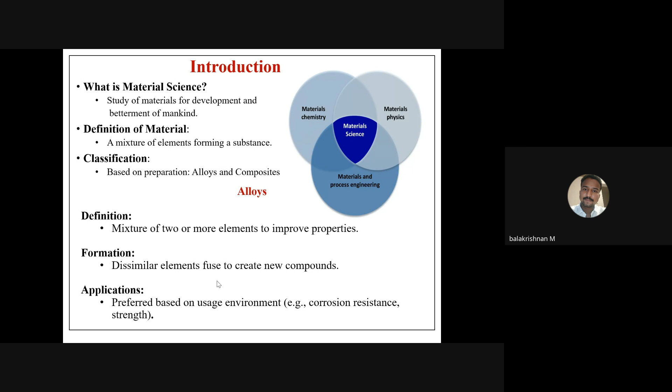When we look into composite material, it is a combination of distinct materials with superior properties. The major composite material structure is improved by matrix and reinforcement. The main advantage is superior physical and chemical property. The composite materials come under the category of polymer matrix composite, ceramic matrix composite, and metal matrix composites.

While considering polymer matrix composite, lots of applications are there. Mostly in the medical field, we are looking at new research materials in polymer composites. But the limitation is it's difficult to achieve continuous phase during the processing. This is very important and difficult while considering the polymer matrix composite.

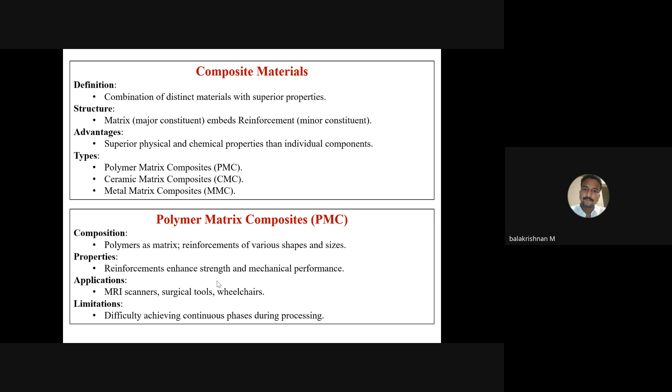Then ceramic matrix composite. The main motive of this kind of composite is to withstand high modulus, low shear strength, and it is very suitable for elevated temperature also. Most ceramic matrix composites are applied in high temperature applications in industries, but the limitation is brittleness due to the increasing toughness. While considering ceramic components, temperature plays a major role.

Metal matrix composite: reinforcement material dispersed in a metallic matrix. So we can consider the metal matrix composite through different preparation methods.

Number one, powder metallurgy: the mixing of metallic powder, blending, compacting and sintering like that. The main disadvantage is the product size is very limited. It is not probably possible for a large size of component.

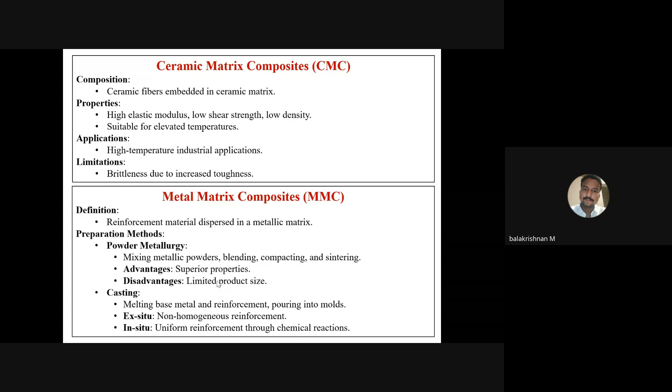Then casting. When we look into casting, it is a very suitable method for large size products. Then in casting, we are considering ex situ casting and in situ casting.

Then we look into metal matrix, aluminum metal matrix composite. It is a classification or subset of metal matrix composite. But due to the application of aluminum, there is a lot of research opportunity in aluminum matrix composite, like economical, lightweight, corrosion resistance, machinability and non-magnetic properties. The most wide applications of aluminum matrix composites are in aerospace, automotive and marine industries.

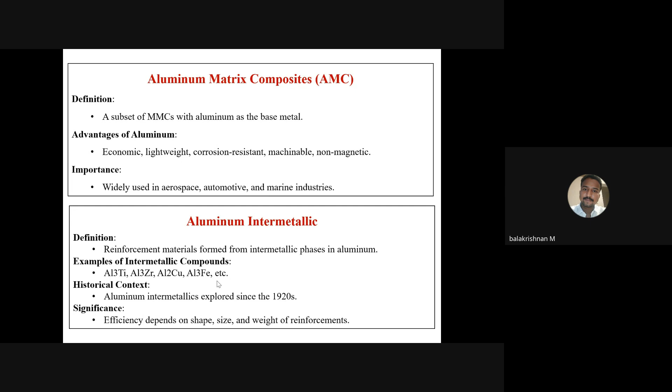Then when we look into the intermetallic composite, the reinforcement materials are formed from the intermetallic phase in the aluminum itself. So we can get excellent bonding in this kind of intermetallic composites. Some examples of intermetallic composites are Al3Ti, Al3Zr, Al2Cu, etc. But it is significantly very efficient, though we have to consider the shape, size and weight of reinforcement.

In this presentation, we are more focusing on secondary processing technique. The processing may be done by two or more processing steps, either single processing or multiple processing, which is carried out on the material immediately after manufacturing or through some other techniques.

The secondary processing refines the property of metal in a vast manner. Some secondary processing techniques, including rolling, extrusion, forging, and equal channel angular pressing, were used to attempt the desirable microstructure changes, because microstructure changes are very important while considering the mechanical property or to enhance the mechanical property of a particular material.

But in case of tensile behavior of intermetallic particles, changes must be needed to improve the tensile behavior. But it is difficult to alter the entire microstructure in the initial stage. The plastic material flow in the above secondary processing techniques is very low when compared to friction stir processing.

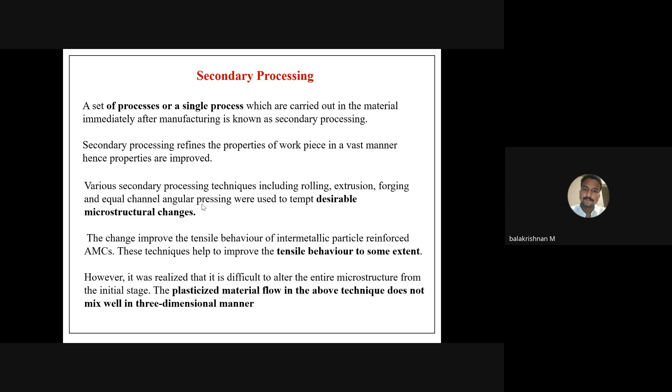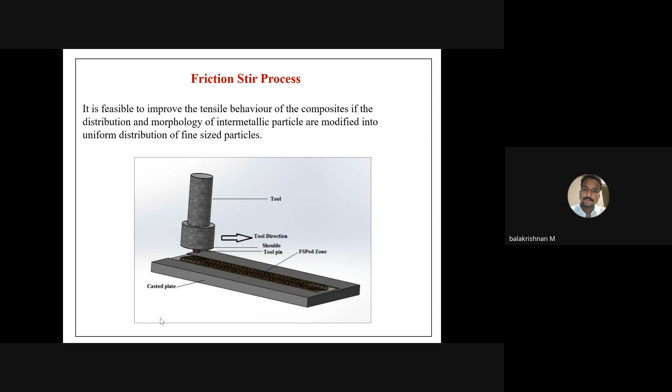In this case we have to consider important parameters like the tool, speed, traverse speed, depth of plunge, dwell time, etc. There is a lot of research opportunity depending on the tool itself. The three major parameters while designing the tool are shoulder diameter, tool pin profile, and material of the tool. Then we must consider what kind of matrix we are going to process. These are the major considerations while selecting this process.

Compared to other techniques like rolling, forging, equal channel angular press, extrusion, FSP has the following advantages. First, it is a solid state process. Then the process parameters and tool design improve the results.

The length of the tool pin can be modified according to the required depth of the stir zone. The FSP component does not undergo any changes—there is no change of shape and size of the metal after FSP.

Poisonous gases, noise, and radiation can all be avoided with this process. The loss of alloying element is limited. It's an important consideration—some losses occur in other processes, but we can limit losses with this process.

It is easy to automate the entire process, and there is no need for a specialized machine—a vertical milling machine is more than sufficient for some kinds of materials, but it's not suitable for heavy materials like bronze. So for magnesium, aluminum, or steel, we can use this approach.

The tool is non-consumable, but even so, it will wear out as the process is repeated. We can still improve the structure of the material with fine grain and a defect-free process zone.

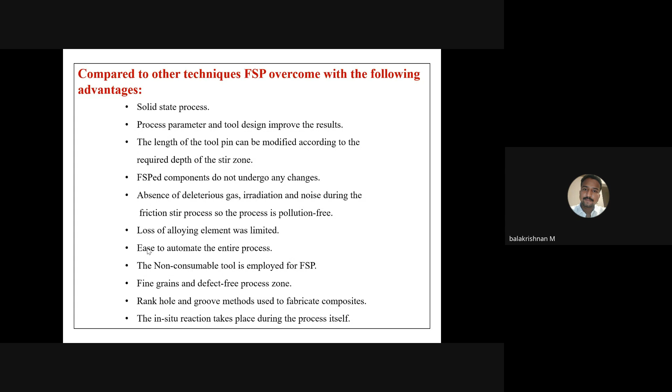The groove method is used for fabricating composites. In this method, we simply take a groove in the matrix and fill it with the reinforced material, and with the help of this tool we can easily manufacture a different composite. So there's no need to go for casting or some other process—it's very compatible, and we can easily perform a lot of experiments through this.

An in-situ reaction takes place during the process itself, because during friction stir processing, the shoulder acts as a forging component. The tool pin plasticizes the material due to friction heat, and this heat reacts with the material and reinforcement, starting the reaction during the process itself.

Why do we go for intermetallic composites? What is the reason? There are a lot of ceramic particles available. If we choose ceramic particles as reinforcement, the main concern is the wettability of the ceramic particles inside the molten aluminum metal. This is a very important consideration. When wettability improves, we automatically get more bonding strength. But with ceramic particles, the temperature difference between the matrix and particles is very high, so we have to consider this first.

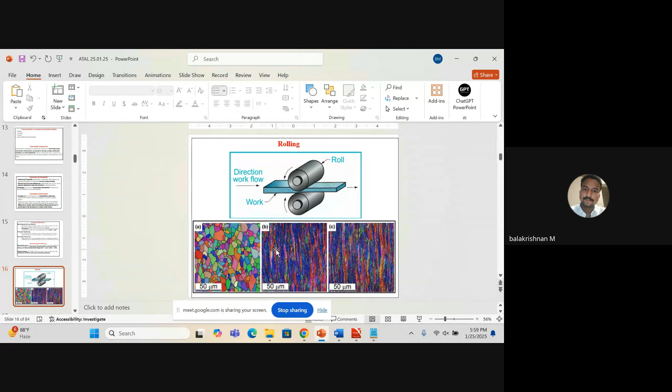At the same time, when we compare the normal direction plane and transverse direction plane, the crystal orientation is totally different because there is no three-dimensional flow of material. During the rolling process, the three-dimensional flow of material is totally absent. That's why the microstructure, the EBSD, is looking like this.

Here's another example, hot rolled 2A14 aluminum alloy. In this case also we can see the normal direction, then the rolling direction, then the transverse direction. Here we can observe that the particles are agglomerated and not evenly distributed due to the rolling process.

While we go for the extrusion process, this is a sample area of extruded parts. Here we can see the plane normal to the direction, the transverse direction, and the extruded direction—this is the cut section of the portions. Here we can observe the formation.

The grain is very fine in the top area. In the middle it is totally different. On the side also—that is, plane 001 is perfect, plane 111 is not perfect, similarly 101. Here we can observe that the enhancement happened on the surface itself.

But even though we go for EBSD up to 0.34 micron, it can be easily observed. But this kind of change will not support enhancing the strength of the material—we can only get the grain refinement on the surface area.

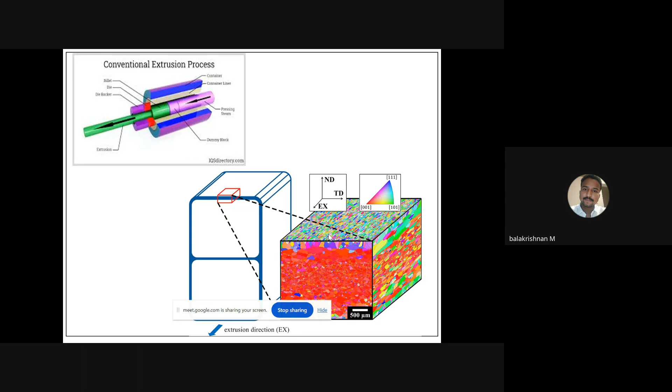One more example of an extruded component—that is the extruded EBSD of the component. Here we can observe that the magnesium was compressed through the extrusion process. Here we can see the particle agglomerations.

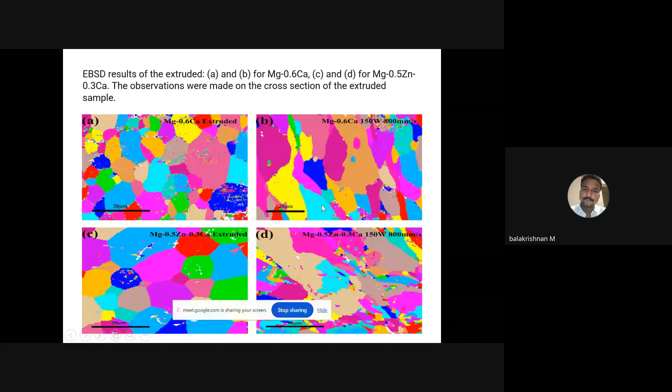Here also we can see that the size of the grain is totally different, because due to that compressive force, the force is not evenly distributed—it only distributes on the top area.

Then equal channel angular pressing—suppose we are considering this secondary process, we can repeat the same process for n number of times. Here we can observe 1 pass to 12 passes. In 1 pass, the grain structure formation is totally different. After 12 passes, it was somewhat refined.

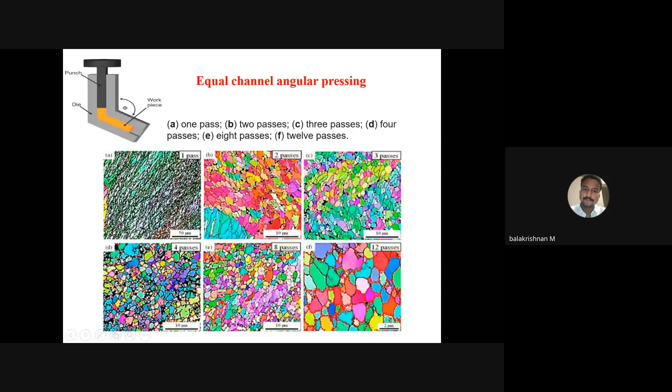But in this case, we can observe that 8 passes have finer refinement compared to other conditions. So in this case, the 8-pass equal channel angular process provides a better result compared to the 12-pass.

Then the forged component—here we can easily observe what happens during forging in terms of grain size, orientations, and dislocations of particles. This is also one of the examples.

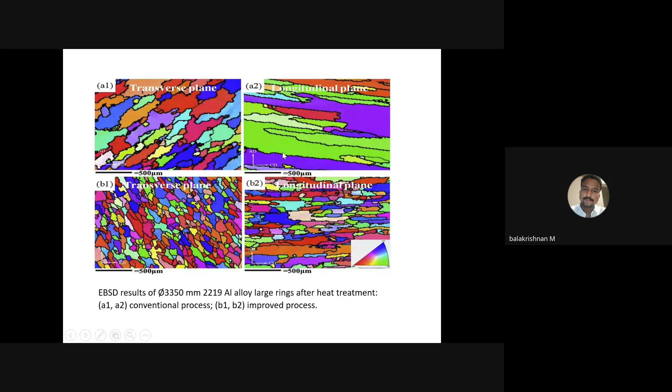According to the direction, that is transverse plane and longitudinal plane, the grain orientation is totally different, and the grain size also compared to A2, B2 is very fine. So we can attain maximum property in B2.

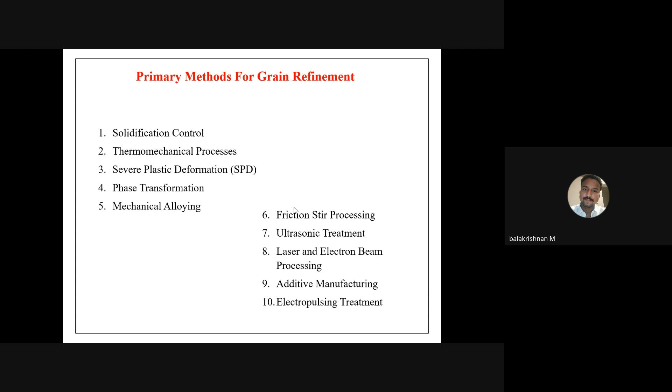Then primary method for grain refinement. Whenever we are looking for secondary processing, these primary stages help achieve fine refinement in the material property. Whenever we select the process parameters perfectly in the initial stage, we can attain results through primary methods itself, such as solidification control, thermomechanical process, severe plastic deformation, phase transformation, mechanical alloying, friction stir process, ultrasonic, heat, vibration and laser. We can improve the grain refinement.

If it is not possible, again we have to go for secondary process. Most of the literature will define that whenever we are going for secondary processing, or when we are considering ceramic particles, it is very complicated to enhance the mechanical property while considering tensile load. When we are considering ceramic particles as reinforcement, it will definitely provide less tensile strength compared to some other methods.

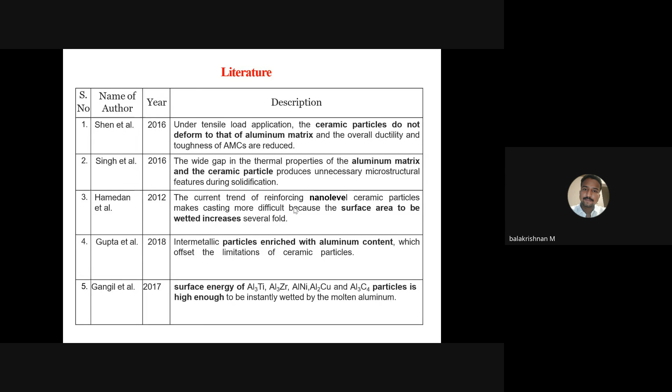Then there is a research gap in this area, which is very important for research scholars. The low wettability of ceramic particles leads to brittle property of the material. However, there is no evidence on the aluminum matrix found with intermetallic. Whenever we go for ceramic particles, the intermetallic formation is totally absent. So we have to go for intermetallics to improve the mechanical property.

Very few works report based on the in-situ methodology of composite development. The minimum and maximum content of reinforcement were not discussed. Whenever we are looking at literature before starting a research, it is very important to know what is the minimum and maximum content of reinforcement to be added in the matrix.

Most cases provide us a weight percentage or volume fraction, but they never mention the maximum value - that if the particular reinforcement exceeds or reaches a certain value, this is the maximum and this is the minimum. Most papers mention 5, 10, 15, 20 like that, but there is no maximum content of reinforcement discussed.

Intermetallic particles were beneficial to improve the hardness and wear property, but improvement in tensile behavior was not realized. So whenever a lot of researchers researched in the intermetallics area, improvement in tensile behavior was not realized, though a few papers mention that a particular intermetallic in certain parameters has improved the tensile strength of the material.

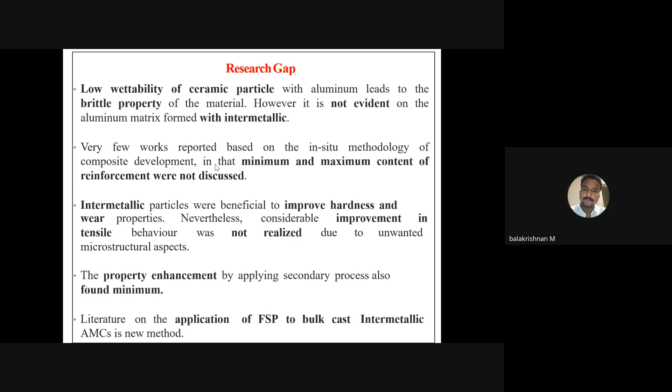Then one more important consideration while calculating the material is what quantity of reinforcement we have to add when going for research. In my aspect, I looked into four different materials and calculated the reinforcement quantity also. I will show that.

These are the important parameters. In my presentation, I am going to discuss four different intermetallics: aluminum with zirconium, aluminum with nickel, aluminum with ferrous, and aluminum with copper. Initially, we have to know the atomic weight of the components, then the molar weight of the intermetallics, then what kind of reaction is going to take place. Aluminum with nickel forms Al3Ni, aluminum with ferrous forms Al3Fe.

Here is an important consideration - casting calculation. Suppose I am going to cast a reinforcement for 1 kg, that is 1000 grams. What will be the reinforcement weight to be added? Suppose we are considering ferrous, the die capacity is 1000 grams, and the reinforcement I am going to add is 53 grams.

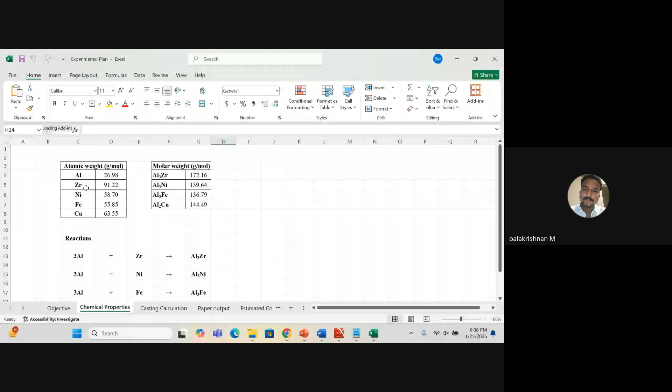Here, loss of aluminum, that is the atomic weight, is 26.98. Here we can see 26.98 into 55.85, and in molar weight that is 136.79.

So we have to consider these parameters before calculating the reinforcement quantity in the matrix. This is very important. Suppose I'm changing the die capacity to 2 kg, that is 2000 grams, automatically the reinforcement calculations change, so we can get the actual volume percentage.

Suppose we are considering 15 weight percentage, so I have to add 353 grams of ferrous. This calculation is made with the help of literature and other reference material. It is very essential for a researcher to know what quantity of reinforcement to add while going for an experiment.

Here we can see the methodology. Initially, AA6061-T6 was used as a matrix here. In the optical image we can see the presence of magnesium and silicon, which are important alloying elements of this aluminum alloy. So in this case, the presence is confirmed.

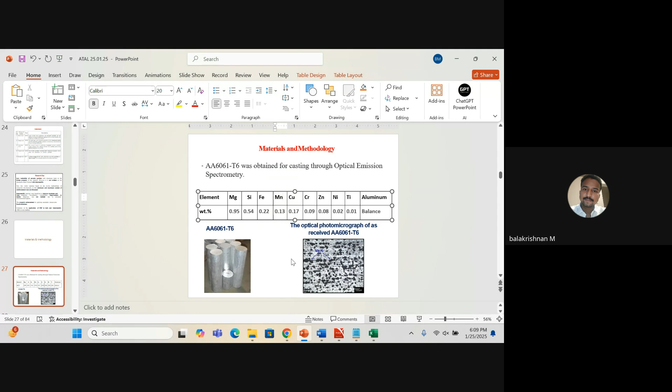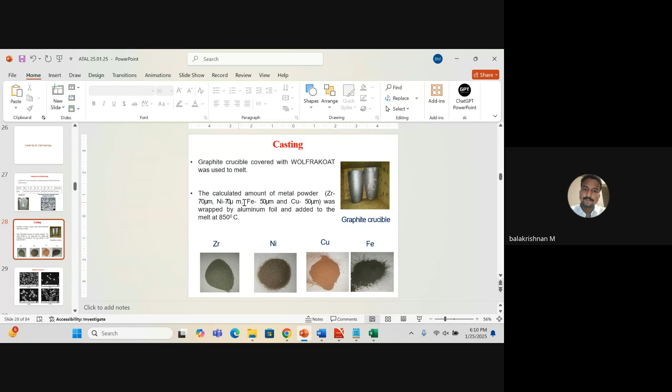Next, these different particles were added to form intermetallic composites inside the molten material. Zirconium of 70 micrometer, nickel, ferrous and copper were added for the reaction. Then initially the FESEM of the as-received powder was taken, that is ferrous, zirconium, nickel and copper.

It is very essential to observe the microstructure after processing, to check whether the particles are present, what is their shape and size, and whether the particle size is refined or not; we have to compare this.

Then again, for the intermetallic reaction, we have to decide how much temperature to maintain and for what time. In this process, 850 degrees centigrade is maintained for 40 minutes to ensure proper dissemination of material. Then the quantity of reinforcement, as per the calculation shown in the Excel sheet, is 5, 10 and 15%.

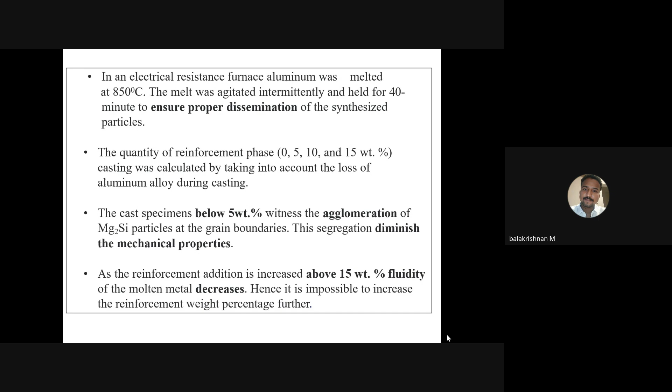Then, if the reinforcement weight percentage exceeds 15%, what happens? It reduces the fluidity of the molten material, which affects the threshold value and solidification during casting. Due to that, the desired microstructure changes will not happen. That's why I limited it to 15%. So the minimum value is 5, the maximum is 15.

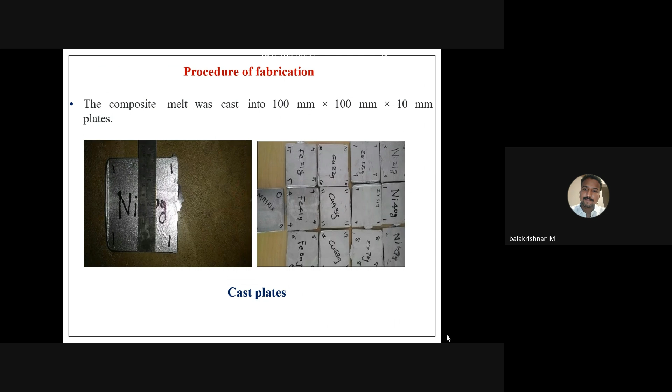Here are the reinforcement metal powders added in grams, then the fabricated composite, then the tool used for this process. For this process, a hexagonal pin profile tool was used with a shoulder diameter of 18 mm.

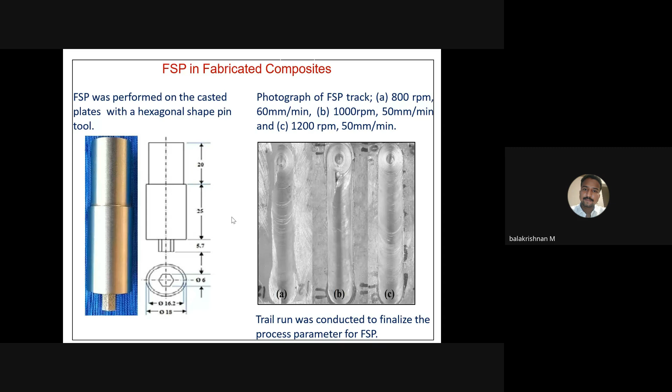We can calculate parameters like traverse speed, RPM, etc. with the help of design of experiment software. But since the process was carried out on the cast composite plate, I went for a trial and error method. In that method, 1000 rpm at 50 mm per minute, 800 rpm at 60 mm per minute, and 1200 rpm at 50 mm per minute were used for friction stir processing trial runs.

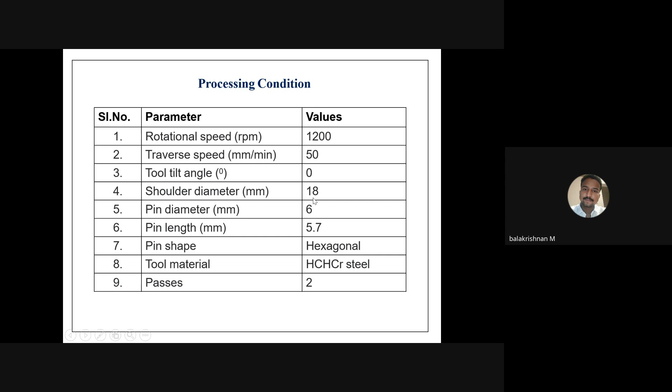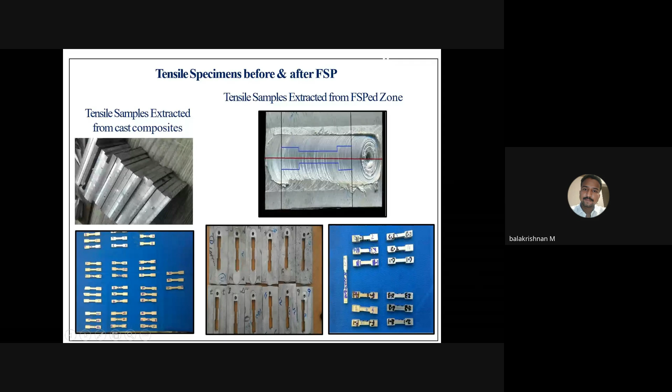In that, I finalized that 1200 rpm, 50 mm traverse speed, and tool angle 0 with that shoulder diameter is more suitable for processing the cast intermetallic composite. Then tensile sample preparation: even though in most cases we prepare tensile samples as per the standard, in this case we prepared mini tensile samples from the friction stir processed area.

Then, for optical microscopy, most researchers make a mistake: when preparing the sample, they prepare it without any mount. Nowadays, most cases use a mount. The mount is very useful to hold the component in a parallel way to get a clearer surface, and Keller's reagent was used as the etchant for this.

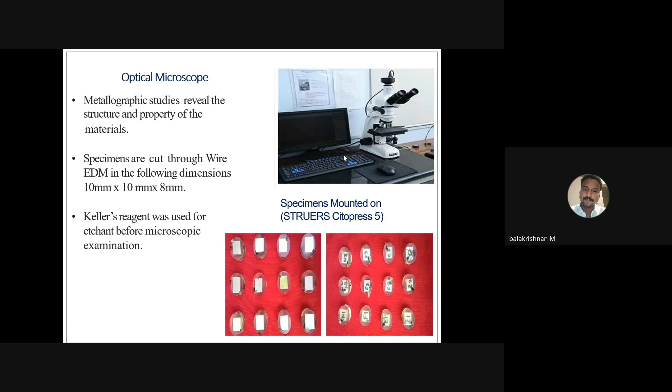One more thing: whenever going for FESEM, most research scholars take their sample in the mount itself. No need to do that; we have to break the sample out of the mount. This way we can easily accommodate more than 10 to 12 samples in the FESEM machine, which reduces the cost of running the FESEM.

Then optical microscopy, we know very well about that. Scanning electron microscopy and optical microscope, backscatter diffraction, EBSD. Then the first composite, that is Al3Fe.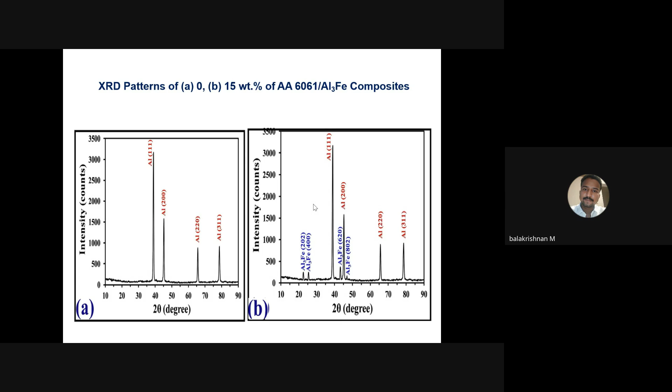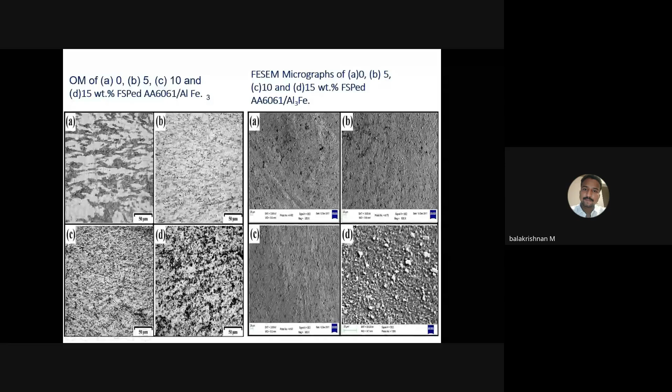So the microstructure needs to be refined using some other deforming technique. Here, friction stir process acts as a deforming technique, used to deform the crystal structure. After friction stir process, we can observe fine refinement of the grain. At 15 weight percentage, grain refinement happens highly, confirming that the tensile strength of the material is going to improve.

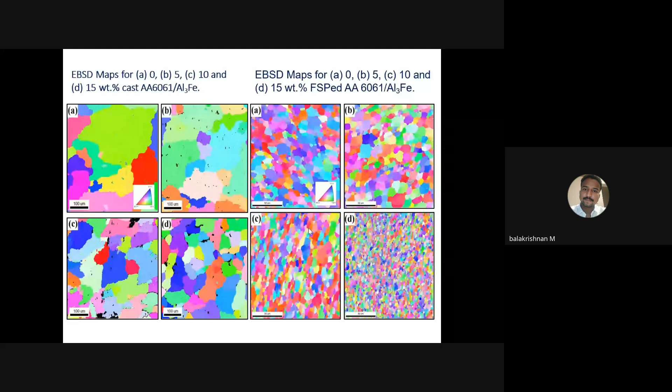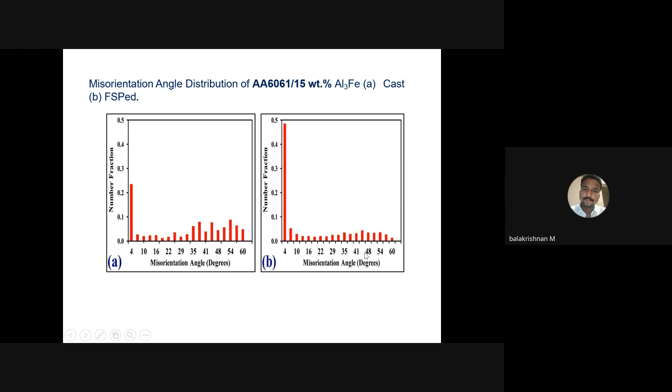Then the misorientation angle distribution, during casting and after FSP. Here we can see that the angle distribution is totally very low compared to the casted matrix.

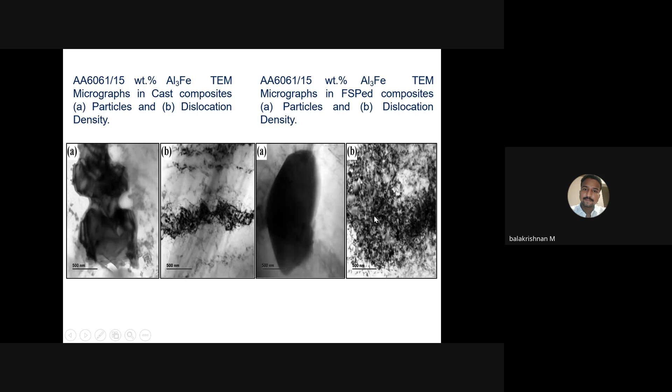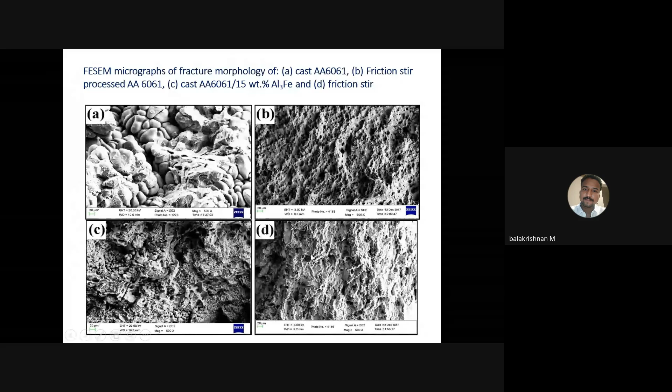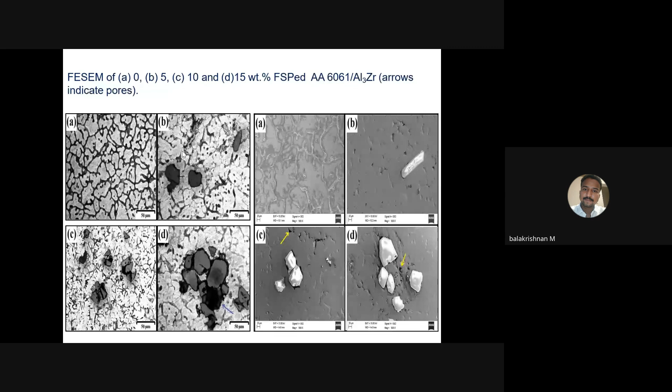In Zr also similar consideration, but as per the consideration, we are using 70 micrometer size particles, so the particle size is high. This one is the cast structure, then this one is after FSP.

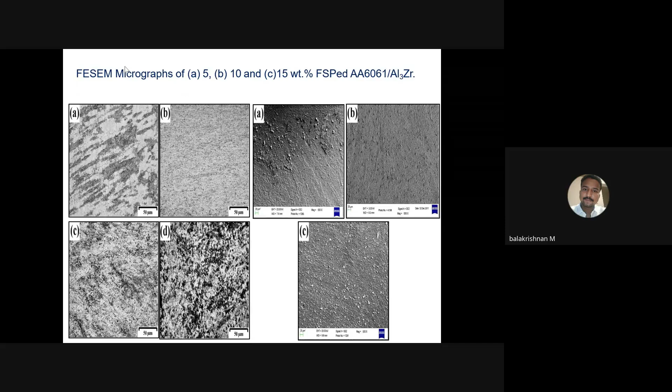Here we can see that the particles are finely refined along the grain boundaries. The grain boundary is also refined very well after friction stir processing. Compared to Al3Fe, Al3Zr refinement is high, but even though the particle agglomerations were in two different sites, it was not evenly distributed. So comparatively, by observing this, we can easily identify whether it is going to improve the tensile strength or not.

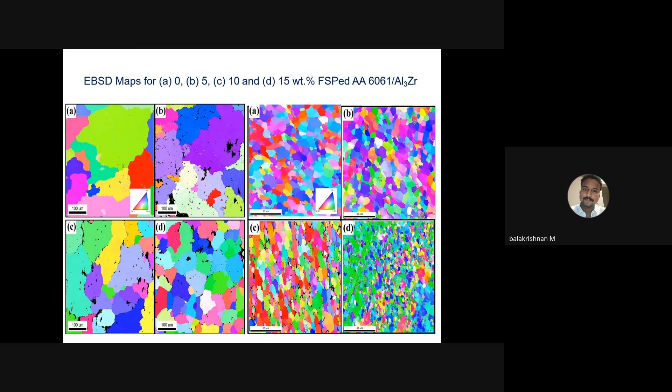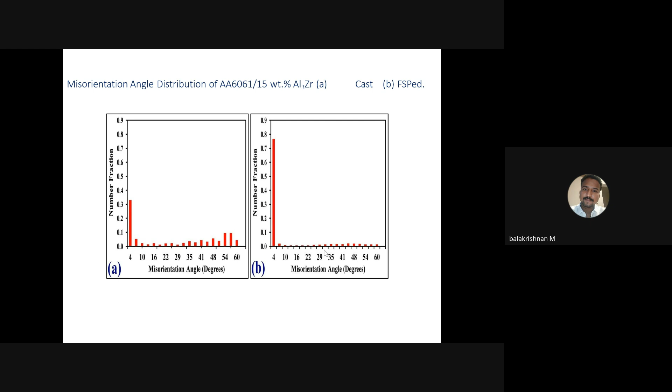Then misorientation angle distribution compared to Fe is somewhat lower because the particles are finely refined by the tool rotation, that is, three-dimensional flow of material. At the same time, the forging pressure will act to refine the particles, and the material will not come out of the shoulder diameter of the tool. So the refinement will happen very finely compared to other secondary processes.

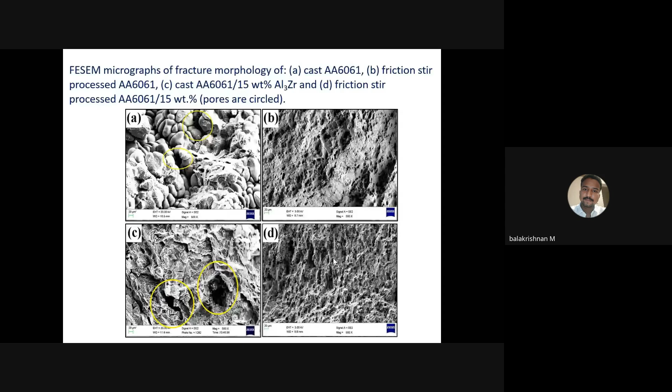Here during the tensile test, we can observe some pores in the Al3Zr particles. This is due to the sudden solidification and the entrapment of gases and displacement of particles. That's why it happened. After friction stir processing, it was completely removed.

Then Al3Ni at 5, 10 and 15 weight percentage. At 0% there is no formation of Al3Ni intermetallic. After 5% we will observe some peaks. After 10% we can observe more. After 15 weight percentage we can observe more number of Al3Ni intermetallic composite peaks.

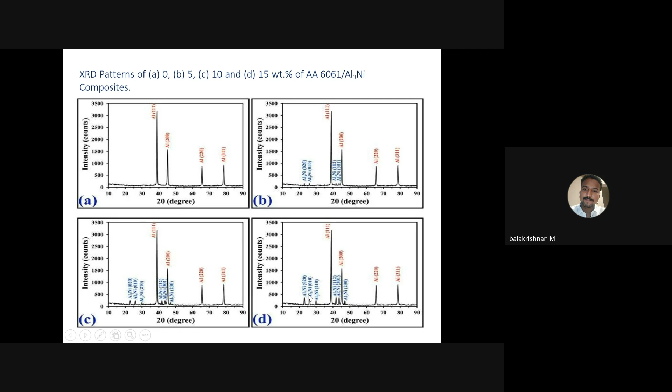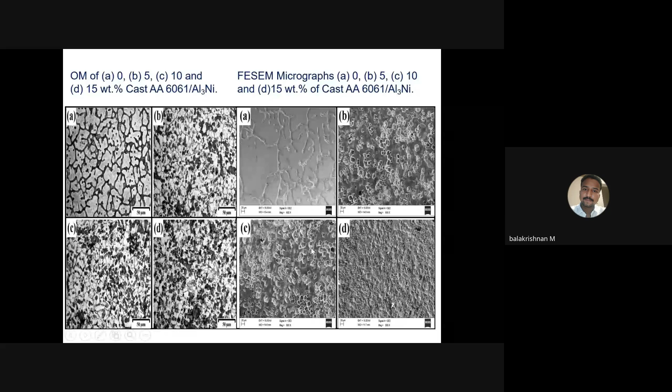Then optical micrograph of cast composite Al3Ni. Here we can see the particles are dispersed, but it was not finely refined. After friction stir processing, it was finely refined. The path of particles we can observe here. In figure D, we can observe the fine refinement of the particles.

Balakrishnan sir, sorry for the interruption.